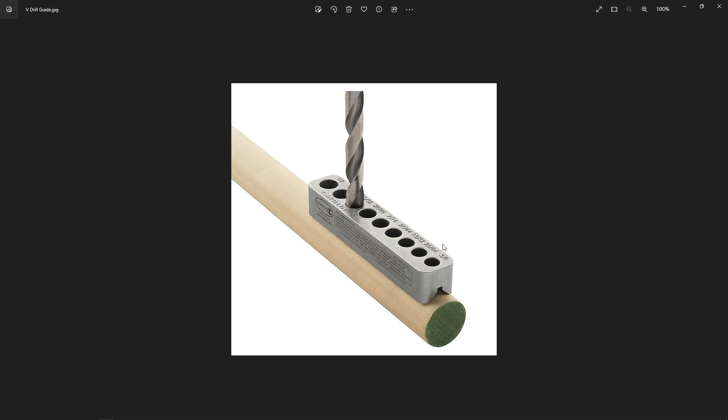So what we're going to do today is, I saw this really neat product called a V-drill guide, and it lets you drill corners into square stock, drill into round stock like this, and it's got various different drill bit sizes. So I'm just going to kind of go through my design philosophy on this.

Usually when I'm working with stuff that I'm going to be drilling through or using around power tools with 3D printing, so like any kind of guide or jig, I want those to be very simple and easy to replace. The main reason is because no one drills perfectly straight holes with a hand drill.

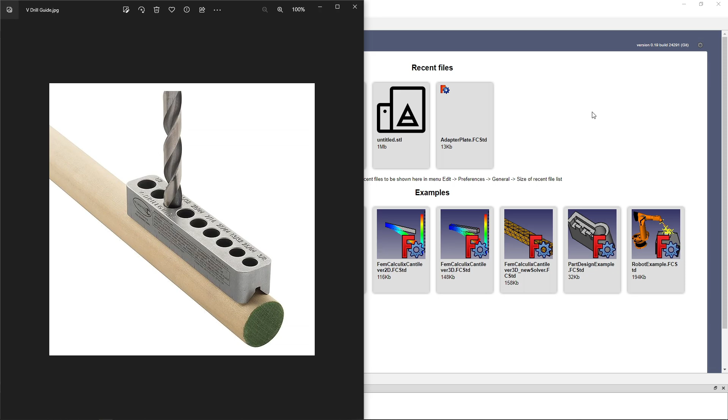And so you're inevitably going to miss, you're going to scrape bits off the side, maybe your 3D print's a little small due to heating and cooling causing it to shrink or swell a little bit, and it's going to wear down the inside of these holes. That's probably either going to destroy your 3D printed tool, or just not provide an accurate hole. So what we're going to do is make it so that we can customize the size of this hole.

And this is going to touch on a couple of key aspects of FreeCAD, the software that I use for most of this stuff. So what we're going to do is start real simple with Part Design. You can see up here I can select the different workbenches, and I'm going to go to Part Design, which lets you build out a single part.

First step, anytime I'm using Part Design, you can see that it's a completely empty tree here. I'm going to hit create body. This creates a new object, and this is what we're going to be doing all of our work in. So I'm going to start by making a body.

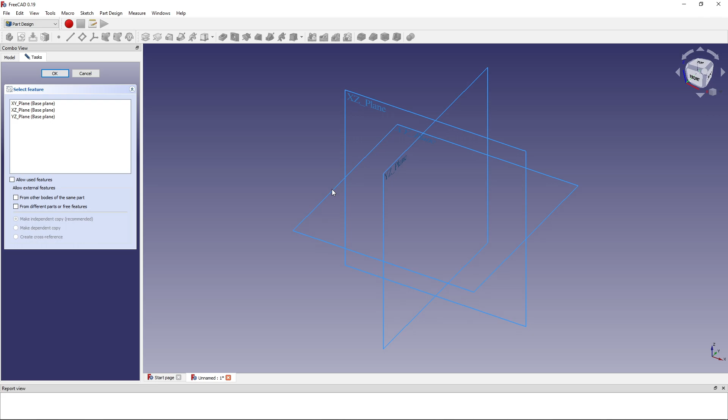And I'm going to start by making a sketch. The way that I'm personally going to do this is I'm going to start by extruding something up. So I'm just going to start here.

You can see that when I create this line at the origin and start to drag it around, a couple of things pop up near my mouse. You can see that vertical line indicator, which means it's going to constrain this line to be vertical. And that dot on the curve means it's going to be constrained to have the endpoint be on the line that I'm currently over, in this case the y-axis.

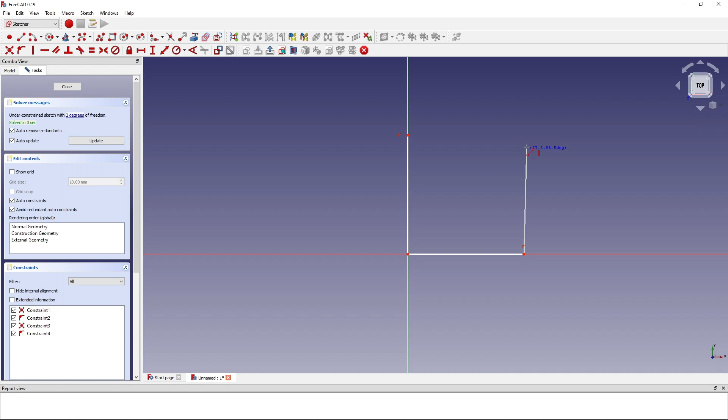So I'm going to do that. I'm going to pull one out to the horizontal, pull one out to the vertical again, and then pull one here, here, and one here. Now the important part that I want to stress is that you want to make sure that everything here is connected.

So if you notice when I was doing that, I would wait until this circle with 4 little lines around it shows up before I start dragging out my line. This means that it will join the endpoints.

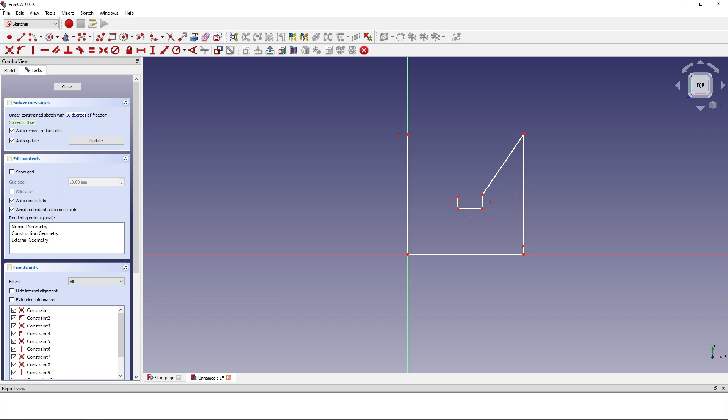So let me show you what it looks like if I don't join one of the endpoints. Let me do that again a little slower. So I join the endpoint here, and let's say I just kind of eyeball it and put it close-ish. A lot of the times, if you're going fast and you miss this, it's going to be something that looks very similar.

And one of the ways you can test this is you can just kind of move parts around it. Oh look, these two are disconnected, right? These are all connected here, but I've got 2 points where it's not connected. Now, how would I go about connecting these two?

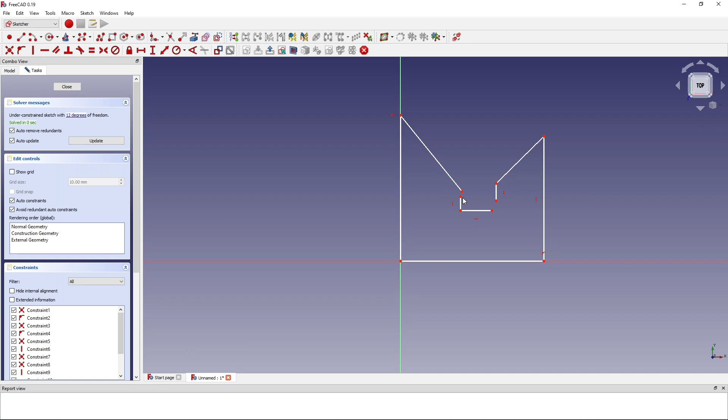I'm going to hit Control and select the 2 points that I want to connect. I'm going to go over here to the constraints and click on create a coincident constraint. I'll click that, and those 2 points are now going to be joined, and these 2 lines will move around. I'll do the same here, but I'll use the keyboard shortcut C.

Perfect. Now, what we have here is just an unconstrained mess with lots of degrees of freedom. There's no units. So I'm going to start by using some of these constraints to make this look more like that guide that we wanted to have. So first off, I'm going to select these 2.

I'm going to hit this one here - this is the equality constraint. This is great for when you want things to be of equal lengths. As you can see, when I move this point up, the other one also moves up.

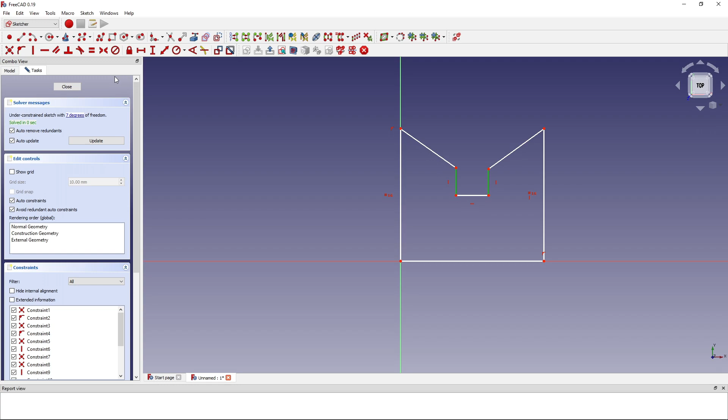So what we're going to do now is use another equality constraint on these two here. Those are also going to be equal.

The reason I've got this cut out in the middle is because of this picture - it allows me to have slight imperfections in how this is manufactured. Because if I have a perfect corner here, and say it rounds a little bit, if I take a piece of square stock and shove it into that corner real hard, it's going to run into the slight fillet or chamfer on the inside, and I won't be able to get it square.

So this is actually a really intelligently designed tool here. We're gonna follow that original design inspiration, and we're gonna go with that.

Now what I'm gonna do here is use this tool - this is the perpendicular constraint. I'm going to select the lines that I want to have the perpendicular constraint, and click that there.

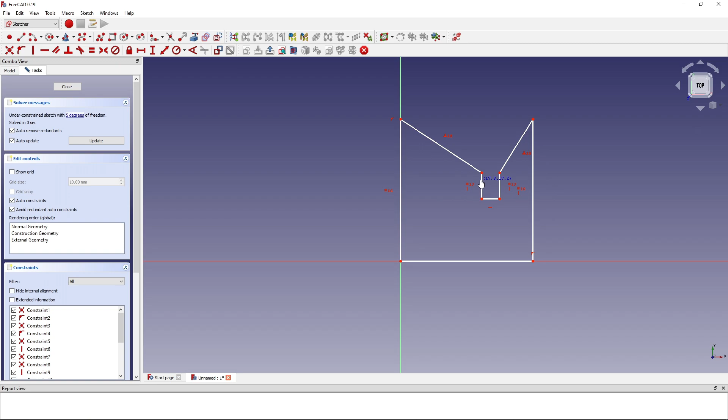Now what this should do is you can see that those two lines are perpendicular.

But what's going to happen is I won't know if this channel is exactly in the middle, because I want to be able to drill direct into the pipe. But if I go like this, it'll be off center, and I don't want that.

So I'm going to use the equality constraint again on these two here. Set those two to be equal.

These two angled lines - and now, as you can see, this little cutout is perfectly centered. These are at a perfect 90-degree angle to each other and a 45-degree angle from the vertical.

So now I'm going to move on, actually let me check here just to make sure the corner is actually connected. Perfect. Now I'm going to move on to adding dimensions.

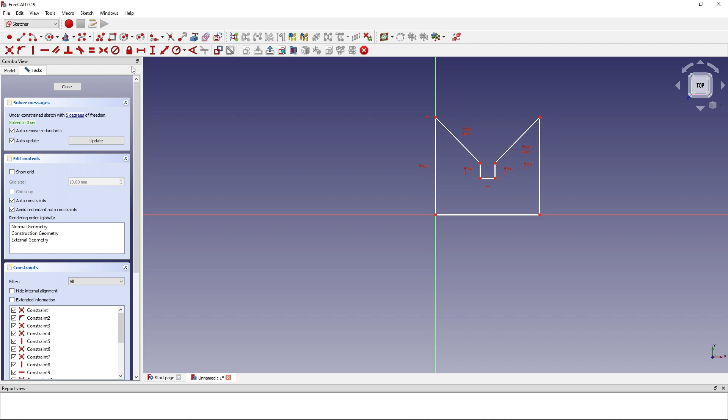So one of the things I like to do, what I just did there was close out of the sketch. As you can see, I'm in the sketch viewer. If I hit close, that closes out the sketch.

But if I just go back here to the model, I can select objects, I can hide objects with the space bar and show them again.

But I won't be able to do things in other workbenches per se, like create a spreadsheet, which is what we're going to do. So you can hit escape, click that close button in the tasks bar, or just hit escape, hit close, and then you're good.

So let's move on to adding dimensions with the spreadsheet. So what I'm going to do, actually I'm going to name this one end profile. It helps keep things organized - let's call this V drill guide. Perfect.

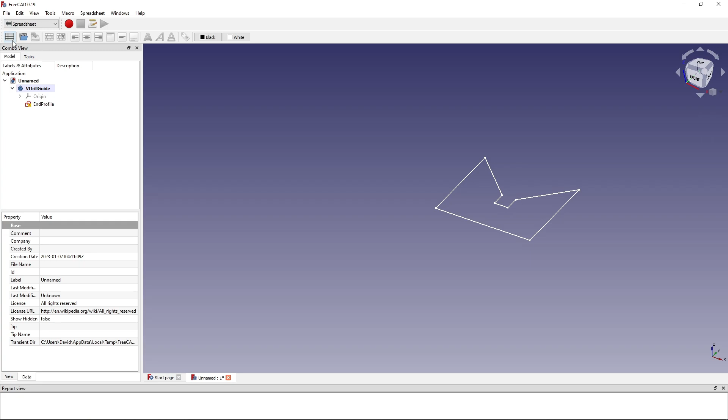Cool. So what I'm going to do is pull out my spreadsheet. I'm going to call this parameters.

So this is going to let me create values. I like to put the name on the left and then put the value on the right. So let's do height, width, and then we'll do...

channel width, drill - let's call this one hole size. Perfect. So I'm just kind of setting out some values here.

Now, me personally, I like to design in millimeters, but FreeCAD automatically does your unit conversions for you. So I can put in...

I'm going to do this project in both, just to make things a little bit funky so that we can really make FreeCAD stretch its legs.

If you don't want to do that, that's fine - you can do it all in inches or all in millimeters, but my personal preference is for millimeters. So I'm going to make this about 20 millimeters by 20 millimeters, right? So 20 mm, 20 mm. That width may end up being redundant.

Now, 20 mm - I'm gonna make the channel width, let's make that 5 millimeters. I'm gonna have the hole size, let's say it's a 1/2 inch drill bit, so I'm gonna go 1/2 inch.

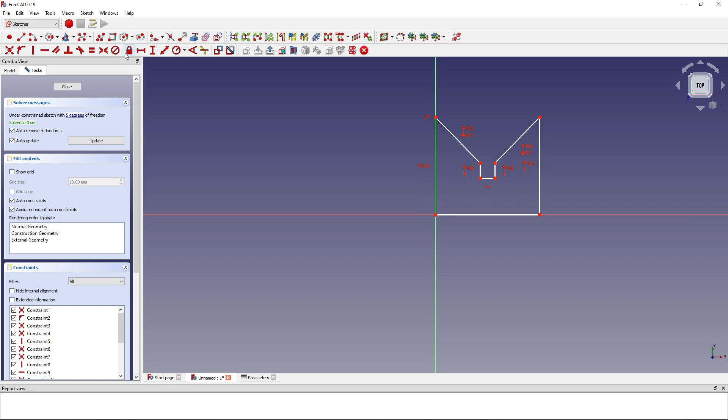So here, these are the constraints - you've got your width, and we're going to go over to this one, the vertical distance. As you can see, it already has a value. What I can do is select it - I could enter 20 manually, but then that won't change based on my spreadsheet.

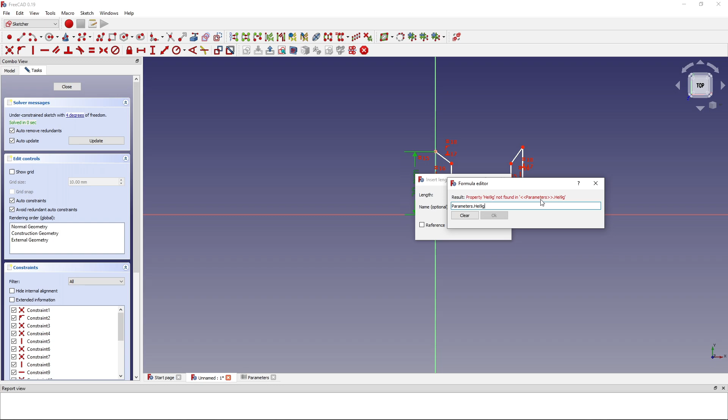What I want to do is hit equals, which pulls up the formula editor. Start typing the name of my spreadsheet, so parameters - I can go down to it and hit enter. So parameters dot, I can also just type dot - this is kind of like object oriented - so parameters dot, and the thing we wanted was height. So the result is 20 millimeters, and as you can see, that matches with the height we specified here. You'll also notice it's automatically added the measurement, making this one the same height.

Now, if you notice, it's actually come up off of the axis, which we don't want. So I'm just going to go ahead and give that bottom one a horizontal constraint, and make sure it stays down there.

Okay, I'm going to add a horizontal distance here. I'm going to do the same, but I'm going to use width. Parameters dot width. Perfect, so you can see it's now like this.

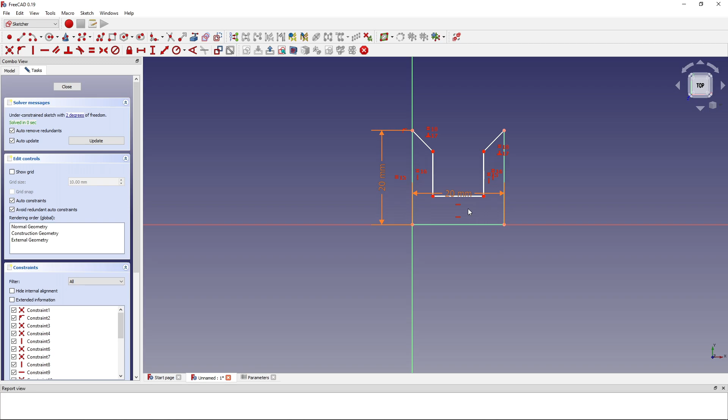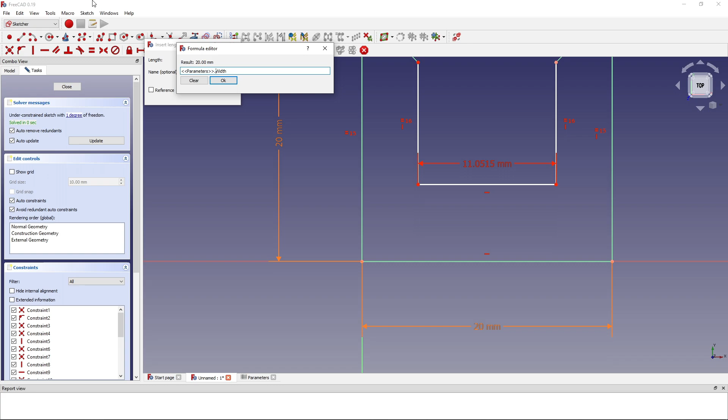And now all we have to do is specify the channel width, so that is going to be in here. Another horizontal constraint equals parameters dot... oh whoops, not width, sorry, it's going to be channel width. Perfect, so that's going to be 5 millimeters.

Now, one of the things you can also do is if your drawing is getting a little bit cluttered, like that looks, I don't like the look of that, I can click on my constraint and drag it around. So you can see that I've kind of neatened everything up so that everything's readable. But I've forgotten one of the dimensions on here.

You can still see that it's an under-constrained sketch with 1 degree of freedom. Everything that's fully constrained is labeled in green, it's highlighted in green, and you'll be able to identify parts that we haven't constrained yet.

So what we're going to do here is we're going to add a channel depth. I'm going to right click in here, insert rows, it's going to pop out a new row. Channel depth. I like to keep things organized, so I'll put things that are related to the same thing together. For example, I have channel width and channel depth next to each other, height and width next to each other.

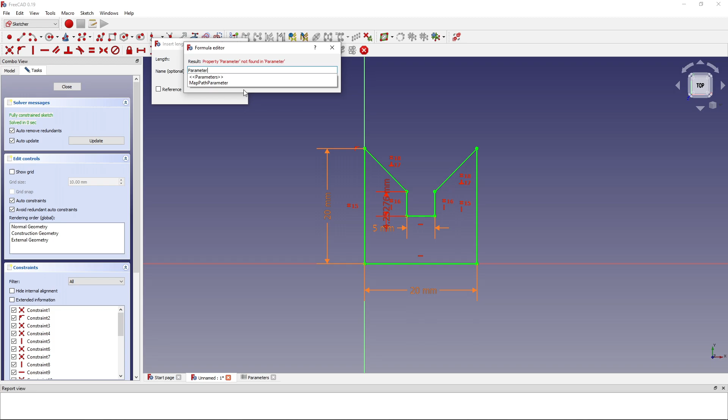And I'm just going to give this 2 millimeters. Perfect, I'm going to go back to my sketcher here. I'm going to give it a vertical distance, and I'm going to set that to be parameters dot channel depth. Perfect, so as you can see, we've now got the end profile of our V-drill guide here.

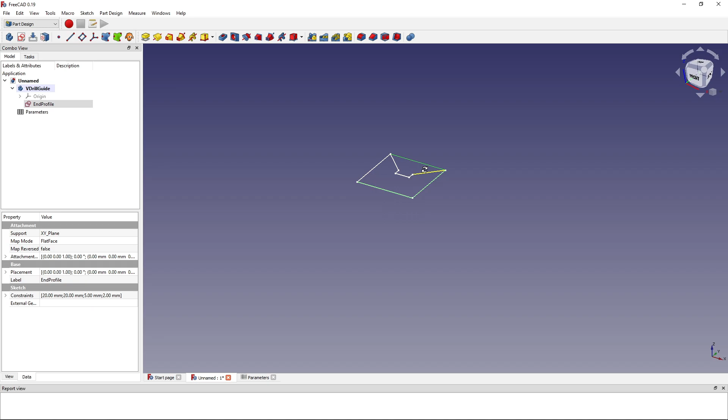It's not exactly the same, but that's all right. We can go ahead and pad this out. So I've exited out of the sketch, and I'm going to select it in the currently active body, which is V-drill guide. I'm going to go up to the part design workbench here, part design. I'm going to select the sketch that I want to pad.

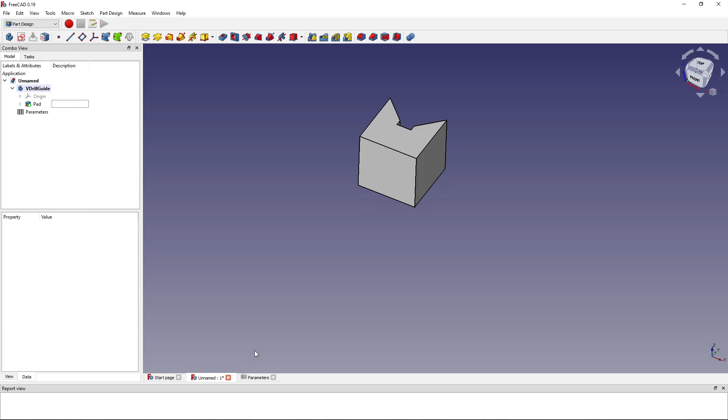And I'm going to click this here, which is pad a selected sketch. So I'm going to give this an arbitrary number, 20. Now, I still need to also give this an actual entry in my parameters spreadsheet.

So I'm going to do that right now. So I'm going to do guide... oops. So I'm going to call this, let's just call this length. Length, and let's go 30 millimeters. Or let's do 20. So we're going to do channel length, or sorry, not channel length, just length.

Perfect, so now I'm going to go back, I'm going to select pad. Now this is actually an important lesson here. One of the things you can do is if you've forgotten to put in the right measurement, or want to go back and change it, you can click here on the operation that I've just performed, pad, and then I can edit the length. So I'm going to set the length, same thing, I'm going to hit equal sign, parameters dot length. Let's see, I don't actually know what this second length is, second pad length, but that first length is what we're actually going to be working with.

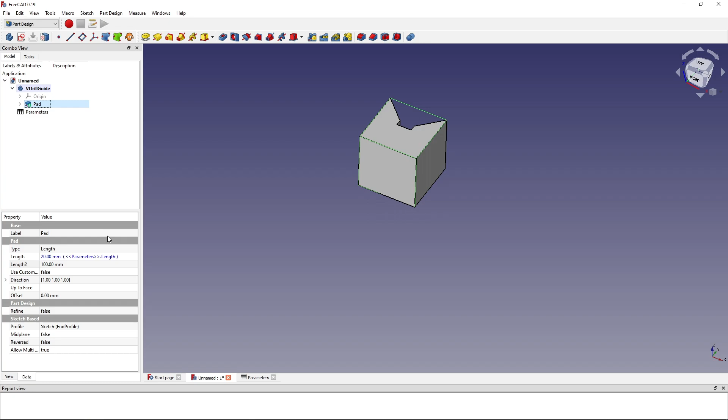So now we've got the general profile of this going on here, but we have not added the hole for the drill to go into. So I have a 1/2 inch drill bit. That's actually huge, let's do a 3/8 inch. No, let's do 1/4 inch. So quarter... oops. So 0.25 inch, perfect, so 6.35.

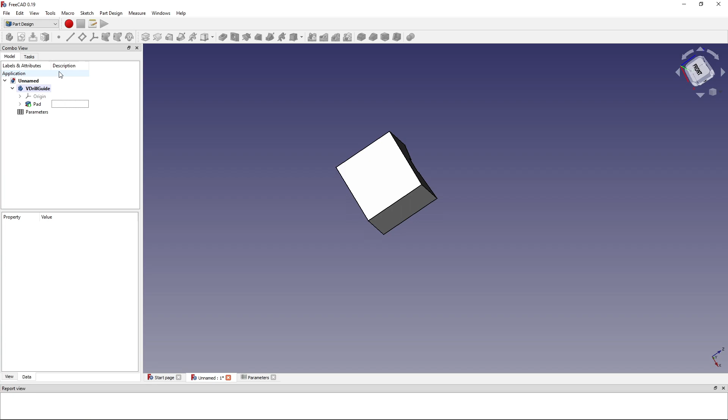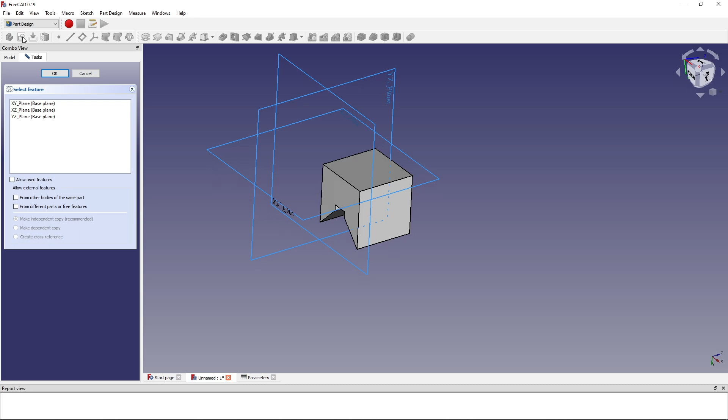So what I'm going to do now is I'm going to map a sketch, or build another sketch and map it to a face. So there are two ways to do this: you can create the sketch first and then map it to the face, or you can select the face and click the sketcher button. I'm going to do one of each for demonstration's sake. So the hardest way to do this is to make a new sketch, doesn't matter which base plane you pick, so just pick whichever one. Close out of that sketch, and then you're going to select the face you'd like to map it to.

Actually, I would rename the sketch. Once you start working with a lot of sketches, and you don't have them renamed, you'll be like, oh, did I want to map sketch 01 or sketch 0300 or something, right? So I'm going to just go ahead and call this one hole pattern.

Now I'm going to click on the face that I want to map it to, which is this top face here. As you can see in our image, they're going from this top face towards that V and into the dowel. So I'm going to go ahead and click this tool here.

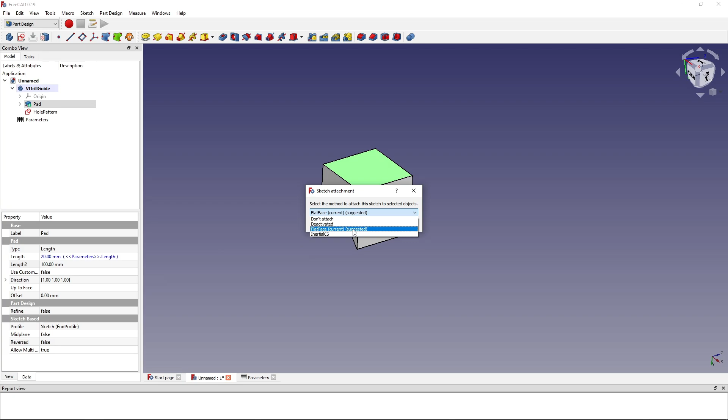Now there are a couple of things. It'll ask you for the sketch. I'm going to pick the one that I just made, hole pattern. I'm going to hit OK. It's going to give me a couple of options to attach the sketch. Most cases you're going to use flat face. I'm going to hit OK.

Nothing will have really happened, right? But when you click on the sketch, it's going to be on this top surface here. So that means that when you're drawing on the sketch, like a circle, it'll be on your sketch there.

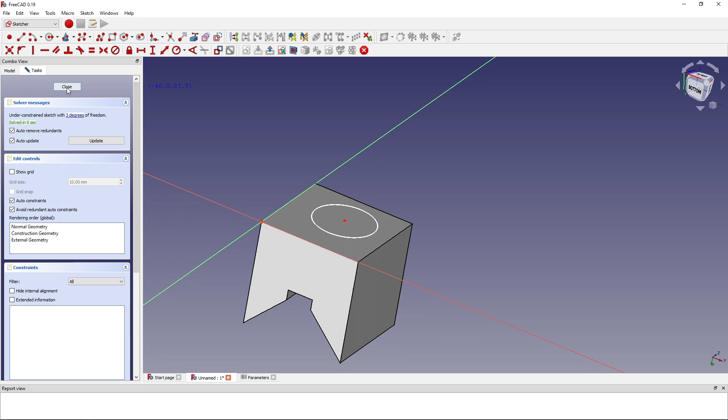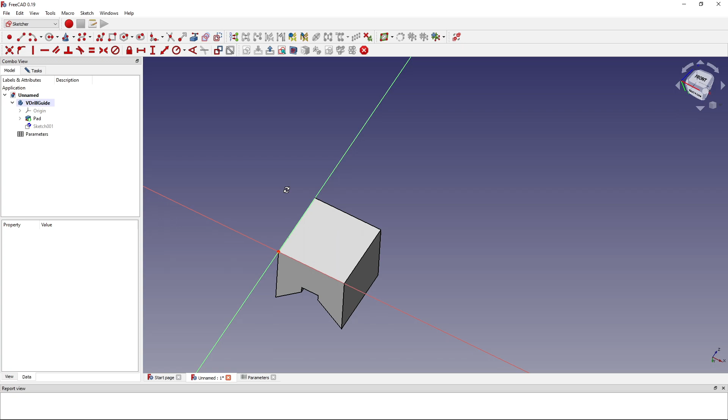Now I'm going to do the process again the way that I've found is most efficient for me. I just select the face I want to map it to and click the new sketch button here. It's going to automatically add the sketch and attach it to the face that we had just selected.

So I'm going to close out of the sketcher and enter the sketch again just to reset my view. Now what I want to do is have this circle somewhere in the middle here.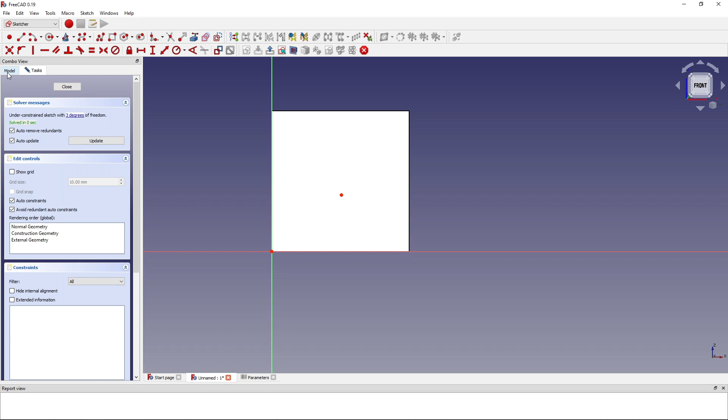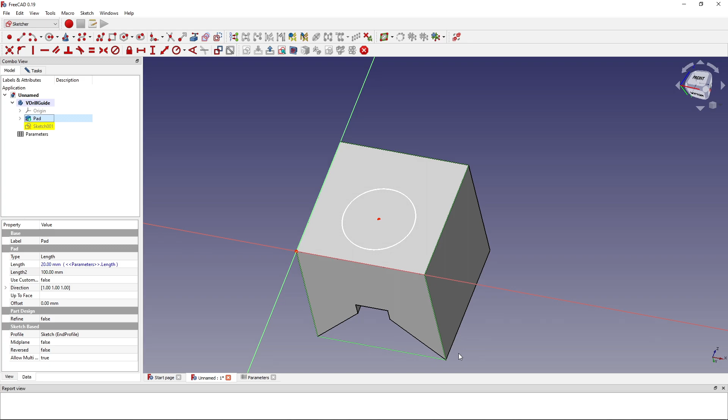Immediately I've kind of run into something that I don't quite like about mapping sketches to faces, and sometimes it's just hard to see. So I'll either do my design work at an angle like this, by holding down the middle mouse button in empty space and the right click button, kind of dragging it around. Alternately, I can switch back to the tree view, select the part I'm working on, and hit space, because I already kind of know what it looks like.

Now what I'm going to do here is use construction lines. This here toggles the toolbar or geometry to or from construction mode. So I'm going to set it to construction mode.

Well, actually I don't usually do that. I'll just use constraints, honestly. So I'll constrain this point to that point, and that's going to be parameters.width divided by 2.

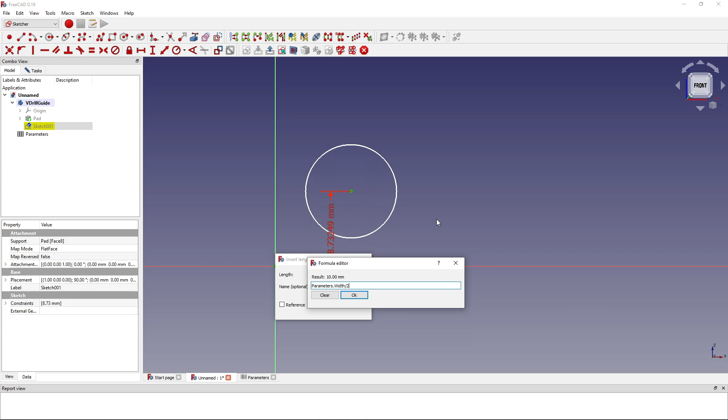Let me just double check that I have it right. So, if I'm right... that was not the right dimension. I'm going to set this to - actually I'm going to do the other one with the correct dimension now. So I'm going to set these two to horizontal.

I'm going to do parameters.width, hit enter. Oh, whoops, got to make sure to divide that by 2. Perfect. What I actually wanted was parameters.length divided by 2, so it's going to be perfectly in the middle.

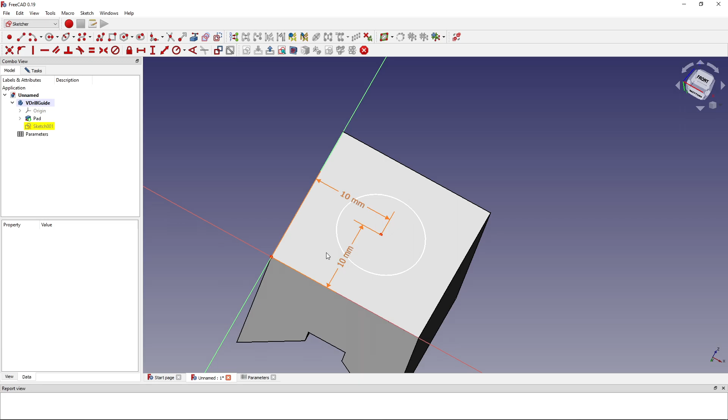So I'm going to go back. I'm going into the sketch here. I'm going to define the size of the circle.

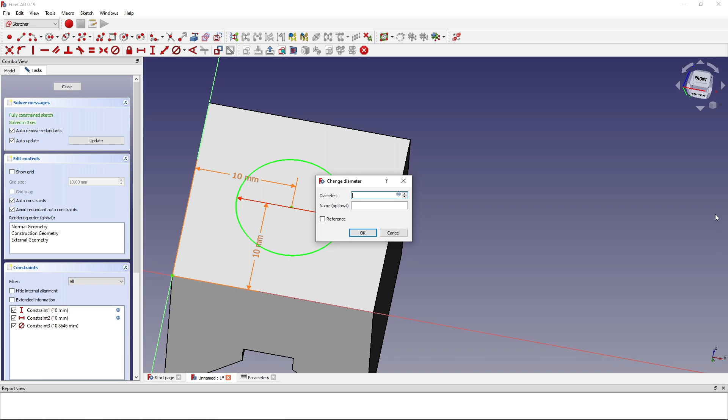Now, there are two ways to do this, and these are very important not to mix up. There's radius and diameter. If we have a 1/4 inch drill bit, that's going to be measuring the diameter. I'm going to set that to be equal to parameters.hole_size.

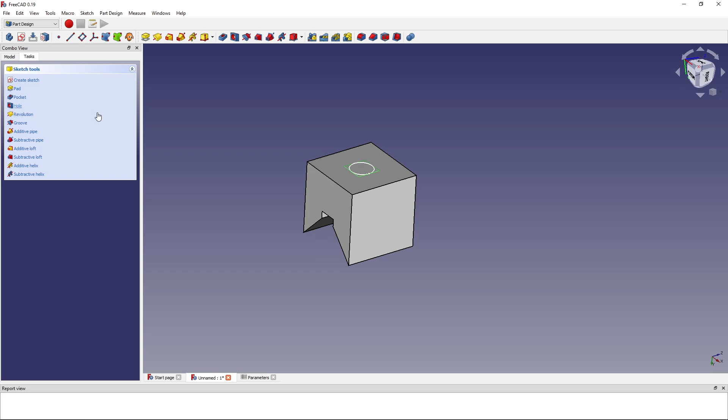Perfect. Now I'm just going to do some cleanup to make this all look a little bit better. There we go, that looks way nicer. Now you can see that we now have the sketch mapped to the top.

Now we want to just kind of punch it through. What I'm going to do is go here and create a pocket. As you can see, I've clicked it, and what it does is make a pocket. Now I can punch this pocket all the way through.

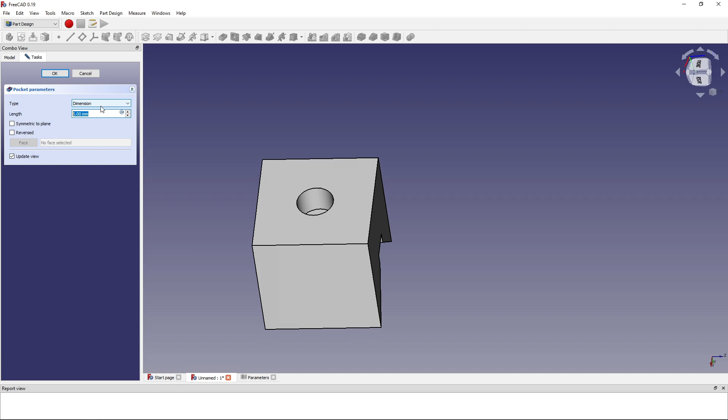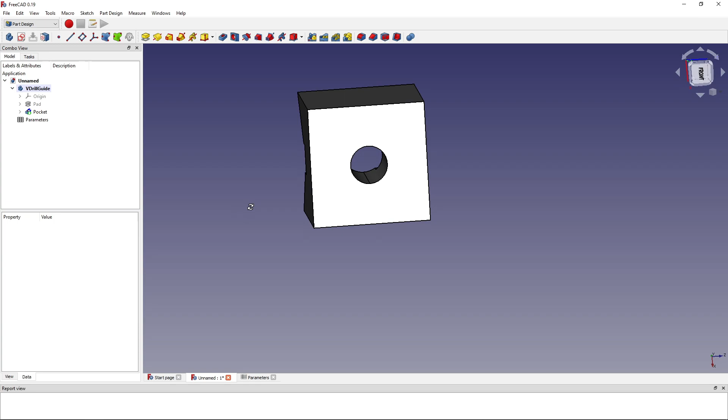Usually when I'm doing just a through hole, I'll go complete overkill on the units, so 100. If we needed to know exactly how far we had to go, we could calculate that. But for applications like this, where I don't have to worry about punching through the other side of the part, like if I was drilling a hole through here, I just go overkill, big unit, 100.

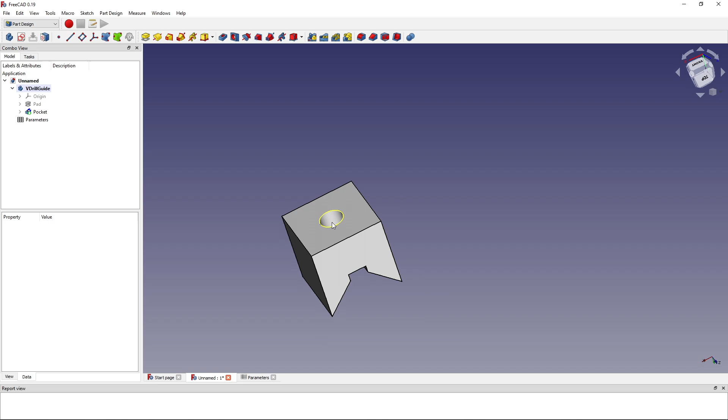So now we've got our piece here. It's got the hole through the center, like in our reference image, but we're missing a couple of pieces. If you're going to be using this and handling it, it's going to have some sharp edges. That's totally fine to have. I personally don't particularly care, but if I want this to look nice, that's a different thing. So if we want to make this look nice, we've got a couple of things up here that help us.

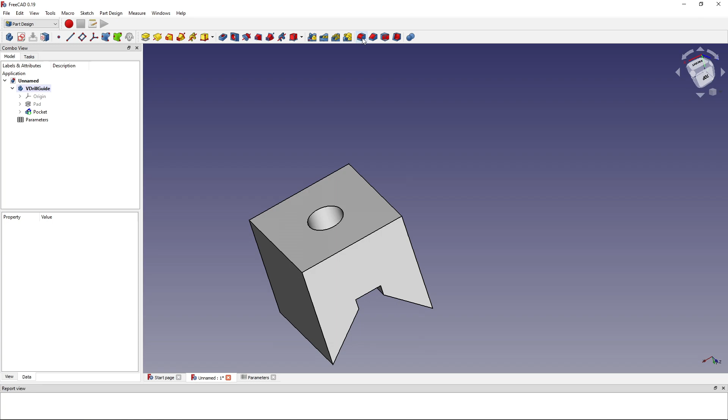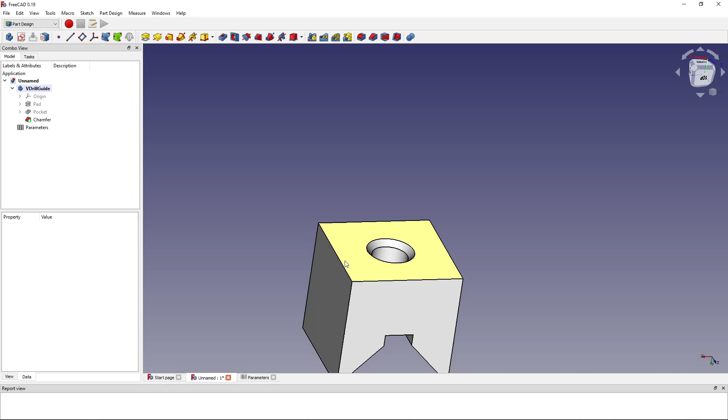These 4 on the right here, I'll start by putting a slight chamfer on this hole, like they have in our reference image. So I'm going to select the edge - it's highlighted yellow, and then I click, and it highlights green. I'm going to click on this one and chamfer it. I usually just do these manually. A 1 millimeter chamfer looks fine to me. Hit OK.

Let me look at my reference image again. So it's rounded off on all these vertical corners here. I'm going to round these off, make this pretty beefy - give it a 3 millimeter radius fillet.

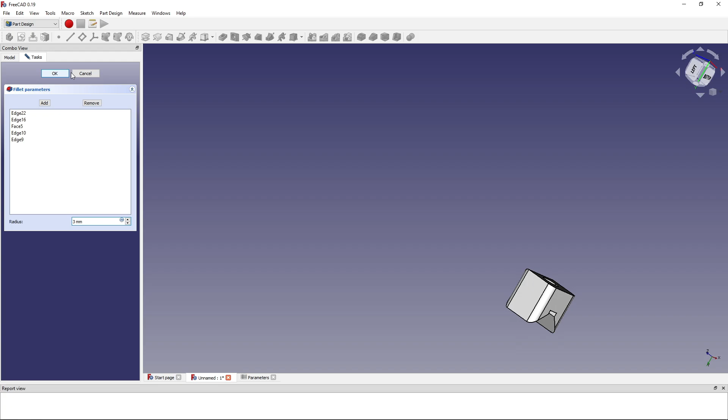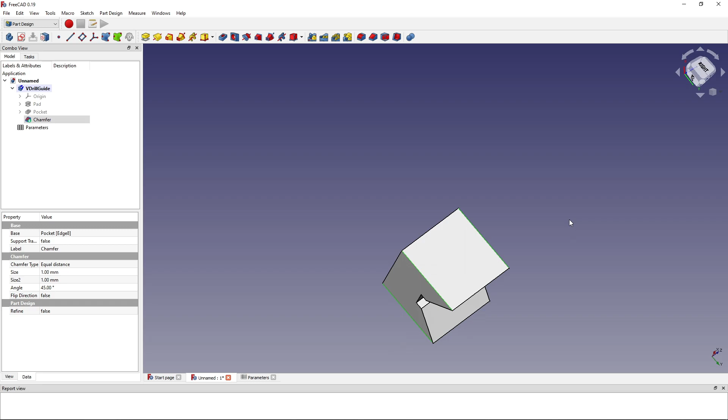Perfect. Oh, it looks like I've selected another edge. To undo stuff, I can either hit Control-Z or delete the last added feature. So I'm going back and I'm going to select all the edges again - hold down Control as I select each of these. Now I've got all 4 of the edges, as you can see. I'm going to go ahead and fillet that again, give it a nice beefy fillet, 3 millimeters.

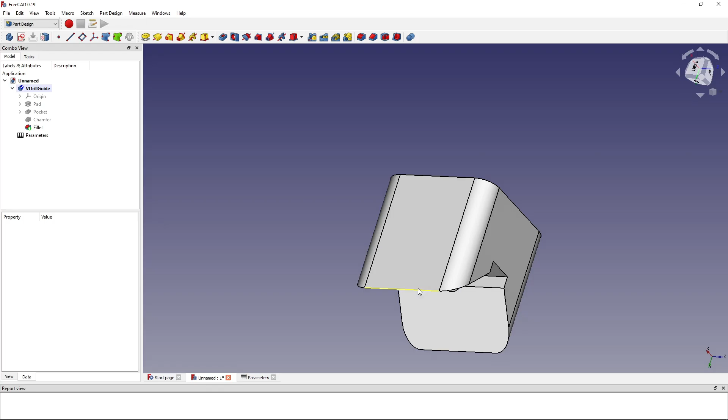That looks beautiful. What I want to do now is round out this bottom edge here. This is going to be an interesting opportunity to explore how FreeCAD handles filleting weird edges like this. If I only fillet this edge, it's going to have a weird transition between round and sharp corner, and it's not going to like that.

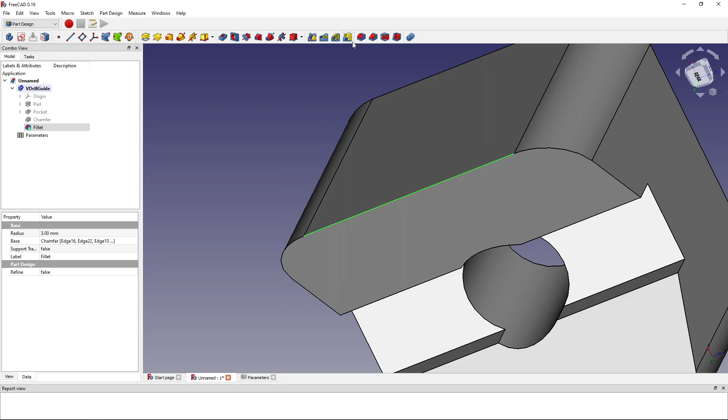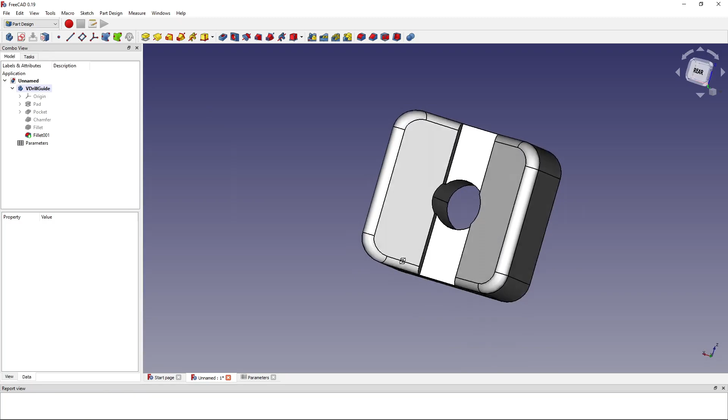So what I'm going to do is hit fillet, and it's going to actually fillet the entire connected edge. This is just something you have to keep in mind when you're filleting stuff. So I'm going to add another edge in here, not that edge - so these are both going to round off.

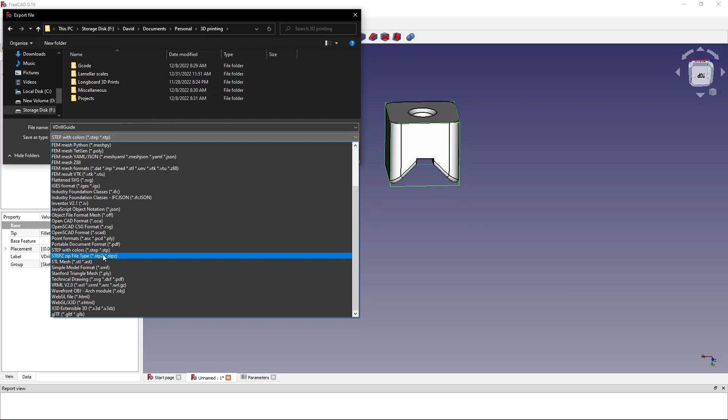Now that I'm satisfied with my results here, I'm going to go File, Export, and export this to my 3D printing file. I'm going to call this V-Drill Guide, and output this as an STL mesh. I'm going to hit Save.

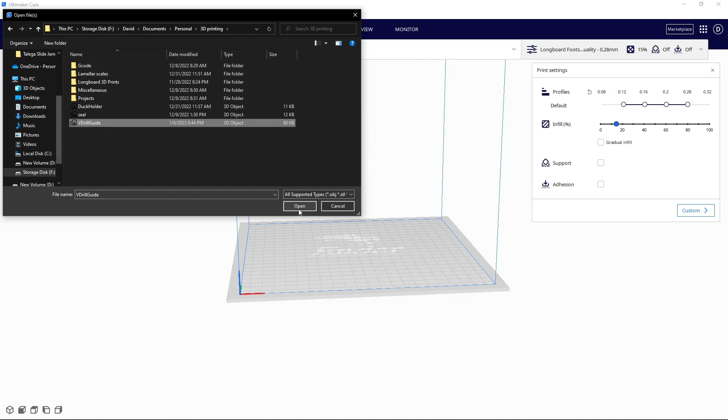I'll see you in a bit in Cura, where I'm going to show you how to orient this for printing. In designing my CAD file, I kept Cura in mind. So we're going to open up our V-Drill Guide - it's going to be placed in the center of our slicer here.

Immediately I see some issues. First off, we've got this weird overhang here. 3D printers are really bad at printing overhangs. Cura will actually tell you, hey, I'm going to have issues with this - you've got this red here, which shows that it's going to have issues.

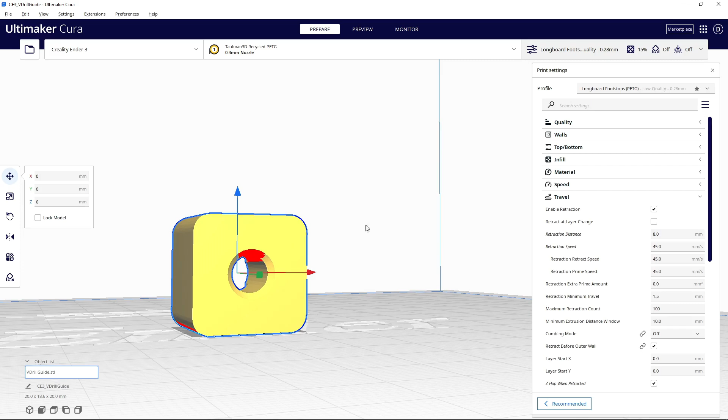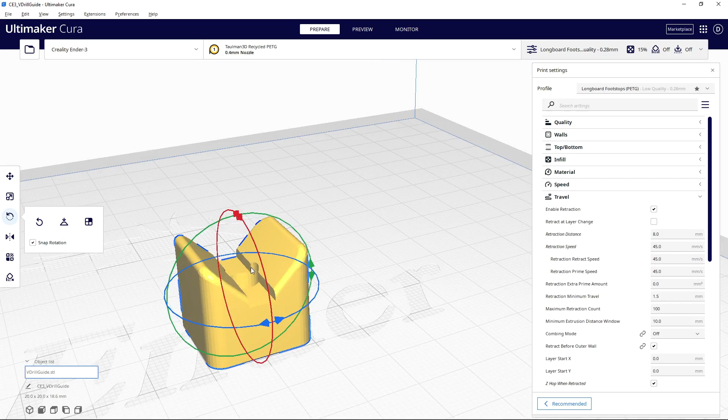So what I'm going to have to do is reorient my model to be flat like this. Now, you're going to say, David, isn't there this chamfered surface under here? I'm going to say, yeah, that's fine. Small overhangs like this are good, but huge overhangs like this hole here, or even this V area, would not be great.